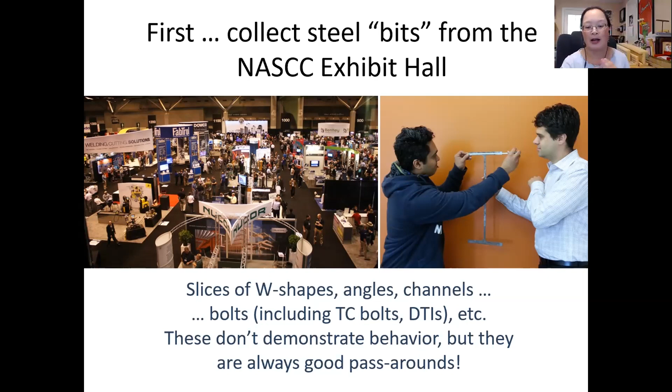Let me start at the top of the list with some foam beams and beam buckling models. Credit for these two different sets of teaching aids goes to Scott Civjan - I don't know if he's still on the Zoom meeting, but I saw him earlier. He gave really awesome instructions for assembling these beams out of foam, and as you'll see later, some other materials. I use these all the time.

Probably the ones I use most often are just the rectangular one, and of course you can show plane sections remain plane, and the tension and compression we see in the cross section for flexure. The W shape, I probably use even more. First of all, it's very huggable - it's really fun to carry around with you.

I use this anytime, like in the picture, if I want to show weak axis buckling, or anytime I need a 3D representation to help the students, whether it's side sway or otherwise, or even just talking about flanges versus web and things like residual stresses, and talking about what's going on through the cross section or through the member.

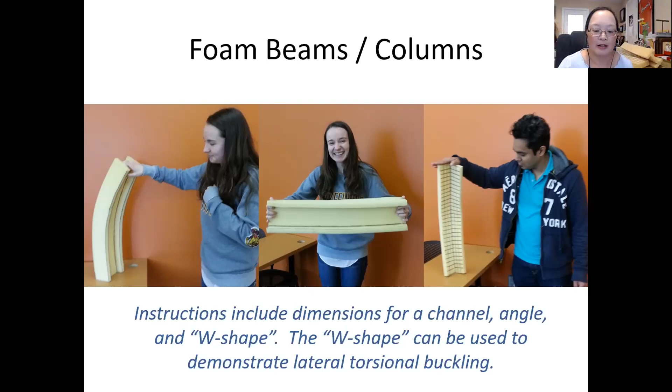Some other cool models from Scott are these beam buckling models made out of overhead transparency and packing tape. You can use these to demonstrate - the instructions show what proportions to use to get one that will show flange local buckling pretty well, one that shows web local buckling - that one's a little harder to visualize, at least with my fabrication skills - and one that shows lateral torsional buckling pretty well.

This one here, I don't know if we'll be able to see - it's a little bit pre-buckled now. But if you can see when I try to put it into bending, I don't know if you can see the flange, the top flange in particular is doing some local buckling there.

And then this one for lateral torsional buckling, you can see it's a little different in the cross section. Usually what I do is try to put this into pure bending, and sometimes it's a little easier to see if I hold it horizontally. You can see just under pure bending, that compression flange is just kicking sideways.

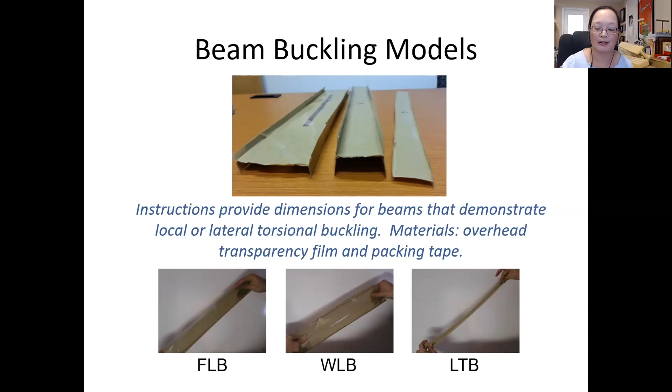So in person, when we're in person, I show at the beginning of class, but then also pass it around so the students can test for themselves.

There are also some great videos online - small scale tests linked from a playlist that's also linked from the AISC Educator forum. Some really neat lateral torsional buckling and flange local buckling, but also different column tests that they did. Lower on the playlist, I believe there are some bolt tests showing bolt shear and bolt bearing failures - a nice collection of different videos that might be useful.

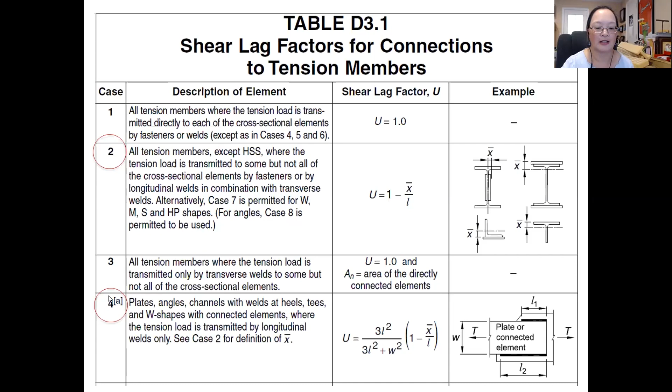And then getting into things like effective net area. When I started teaching steel, I felt like Table D3.1 was kind of a mystery to students, as far as what's going on here, why do we have these different things going on with effective net area and these shear lag factors. So I just want to highlight a couple of things for Case 2 and Case 4 with some hands-on demos that you could use.

For supplies, you just need some paper, some cardboard for connecting on one leg of this paper angle at one end and connecting to both legs of the paper angle at the other end, some tape to connect it all together, and a marker, optional, if you want to show connections there.

I'm going to show parts of a quick video here. This is a link to a playlist that has a different collection of videos that I'll be showing today, and some more. Let me switch over here.

All right, so are we seeing the playlist now? Yes, no? Okay, wonderful.

So this is the playlist, and again, it's linked. You can get to it with that link on that slide. These are more fun to do in person, but you are welcome to use these videos if you would like to. I caution, they're very, very homemade, not very professionally done, but if you find them useful, that's great.

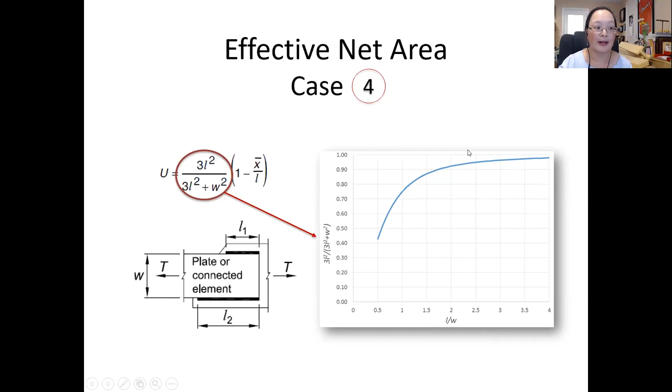We can do a very simple demo just using patchwork quilting fabric or something similar to that.

And when I had to do this remotely - usually I should mention, usually I have at least 3 people doing this: one person trying to be uniform tension, one person trying to be the welds at the other end, and then me talking through the demonstration and doing some tapping.

But when we were remote and I just had myself and my helper here, let me switch back to the videos here.

Oh, come on. Oh, that didn't work. Hold on, try again.

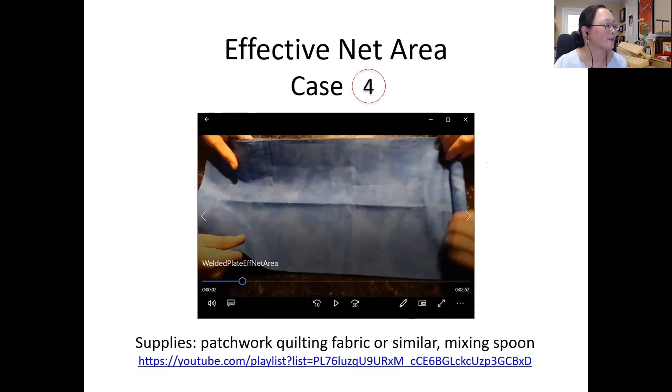All right, I added a mixing spoon. What you'll see here is at the end, that's the uniform tension across the cross section. I rolled the fabric around the mixing spoon, so I could just grab onto that spoon, or anything with a long handle, with one hand and have fairly uniform tension at the end.

Here I'm talking through the aspect ratio between the length of the welds and the distance between the welds. As we're initially applying tension, we can look at how the stresses are distributing from the cross section with uniform tension over to the section where the welds are. That portion where I'm holding onto or pointing out there isn't a lot of tension, it's just kind of flopping around, as opposed to where there is some good tension in the plate.

You can kind of feel it in the fabric. And then you can change the aspect ratio between the length of weld versus the distance between the welds, and describe how that is different than the previous case. So we have something like that going on. And then, go back to this presentation.

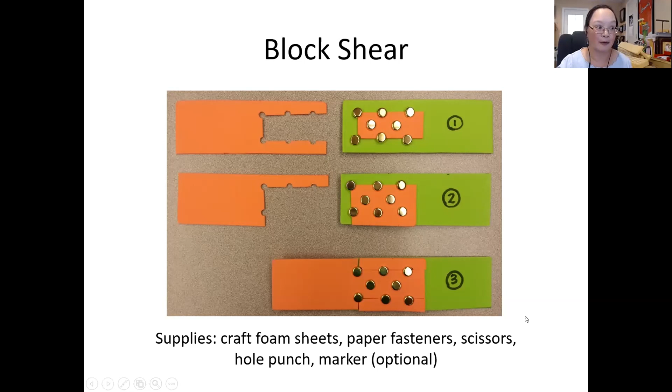Similar discussions happen for these other modes that we have here, and we talk about what's different if we have a different bolt pattern and so on. That sure helps set things up for when we do different calculations and examples.

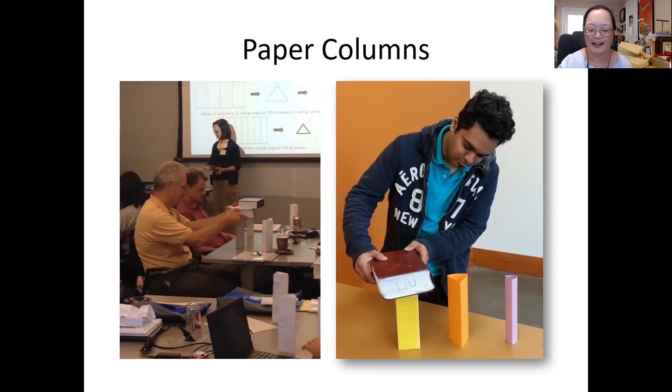You might be able to guess what happens - these two do fine as far as supporting the load, and this one doesn't fare quite as well in terms of supporting the load. That's kind of fun. I always enjoy the students' faces when they walk in - I usually do this in the lab session - and they see all these materials on the tables, they're like, what is this? It's like kindergarten again, so it's a fun departure from the regular class activities.

When I do this remotely, and may or may not do this when we're back in person, I did a discussion board assignment where students, individually or in groups, did these tests on their own at home and posted their predictions for what would happen, as well as photos or a short video clip of their load tests. When I posted the assignment, I included an instruction video about how they were supposed to fold the paper, being careful about fabrication and loading, especially for the one that gets local buckling.

After all the students had submitted, I posted the results of my own column test. After the students posted their predictions and photos or short videos, other students reviewed and liked their favorite post from classmates. The one with the most likes was the one that we shared and discussed in class.

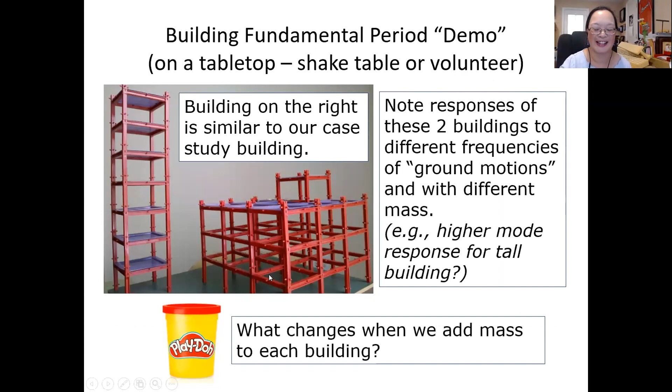Some other things, like if you're talking about earthquake loads acting on your steel building, kind of a shake table demonstration. This particular one I did - this building on the right is very similar to the case study building we use in class, and then a taller, skinnier building here. We also played with mass, adding Play-Doh, and looking at the responses of the different buildings.

The materials I used here were a girder and panel set, I think originally from the 50s or 60s. I got one of the original sets from eBay for Christmas one year - best Christmas ever.

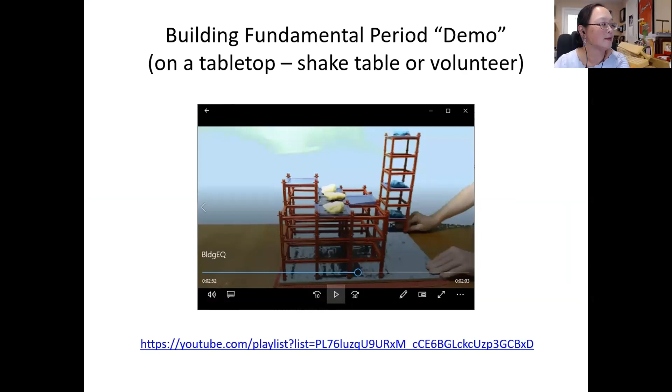But in any case, let's take a peek at the video here. I don't know why it doesn't want to do that. Oh, come on. All right, there we go.

When I can, I borrow from one of my colleagues a little tabletop shake table, but you can just do this with a wooden base and just with people power.

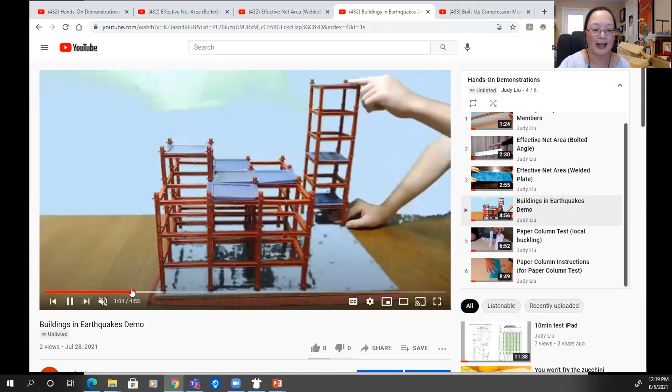And so we talk about what we expect from these different buildings as someone is acting as a... oh, come on. Apparently I did a lot of talking on here.

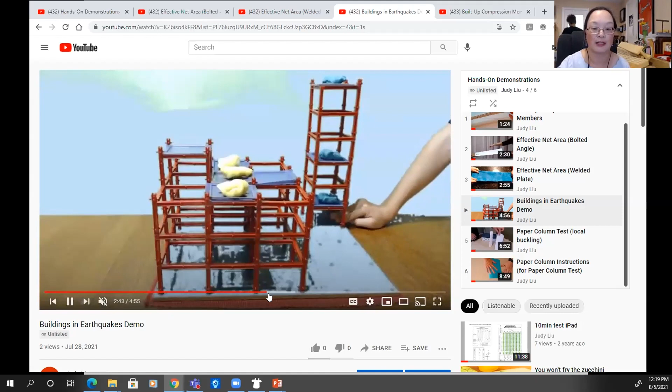Someone acts as an earthquake, and we talk about the different responses of the different buildings and how that relates to the fundamental period of the building and the frequency of the ground shaking. Then we add some Play-Doh mass and also talk about what we'd expect in terms of the different response and how that's realized.

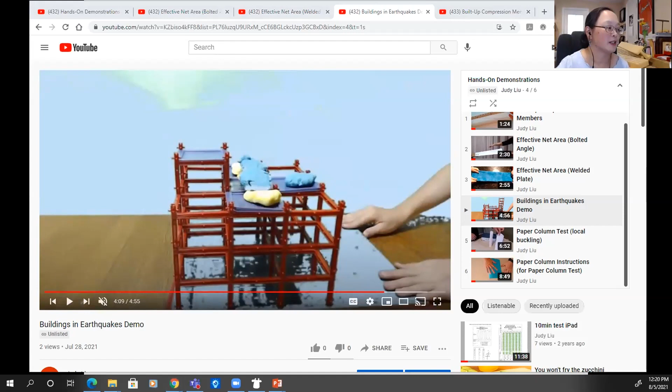I do have a problem with uplift with the taller building, so at one point we take off the taller building so we can look at the ground shaking it takes to activate this shorter building here. So that's a fun way to get some visuals for our earthquake loading.

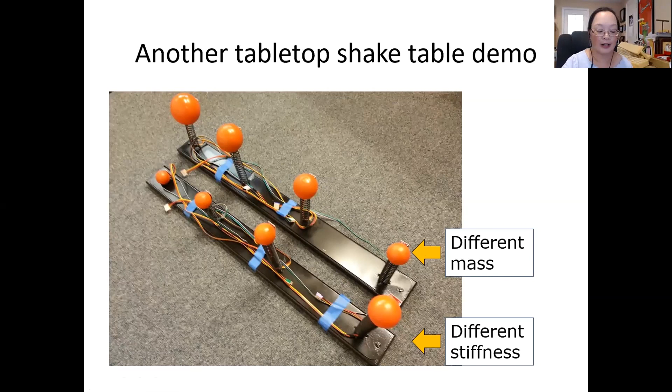I believe below this video there's also a nice supply list if you want to make your own demonstration that looks something like this - simple but very effective. Some of my colleagues made these very simple single degree of freedom models, ones with springs - same height springs but different masses, and then same masses but different stiffness springs. Those are always very simple and effective as well.

I don't know why it never likes to do it when I do it first. Okay, third time's a charm, I think. Come on. There we go.

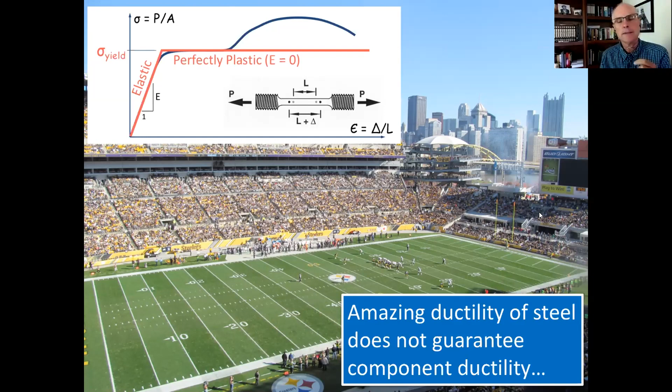Okay Judy, so - all right, no problem, let's start here. This is actually what it looks like. If we start at a stress value of 0, with corresponding strain at 0, we'd be at the 0-yard line. If we apply enough stress or strain to get the material to just yield, reach our yield point, that would be the 1-yard line - so for the full football field, we've only advanced 1 yard.

Then to get to strain hardening, we'd advance 9 more yards to the 10-yard line. And to really demonstrate the ductility, this material doesn't rupture until you travel 90 more yards in football field terms. So there's a phenomenal amount of ductility in steel, and we can take great advantage of it if we know what we're doing.

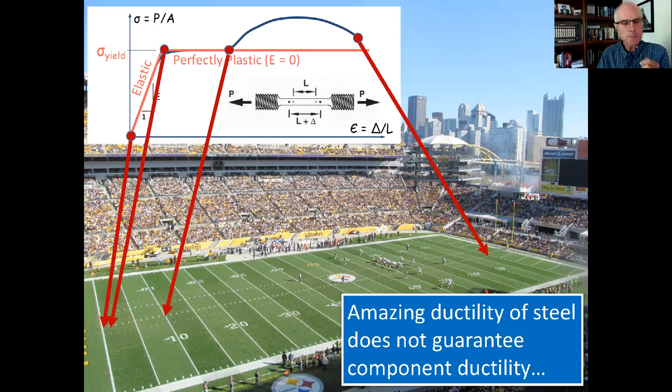On the other hand, just because you have ductile steel doesn't mean you'll get the performance of a connection like that. We think back to Northridge and those types of problems we've had in the past, but those are behind us now. All right, next slide, Judy.

One of the concepts I try to demonstrate to students, that they sometimes have trouble with, is the idea of residual stresses. Many of you are aware of this, but I'll recap so you're up to speed. Effectively what happens is the section is rolled into an I shape, let's say, and then it's put over on the side to cool.

When it cools, when it's super hot, it doesn't really have much modulus of elasticity. For a while the whole section cools pretty uniformly and starts to shrink in length. But eventually, areas with the most surface area, like the flange tips, tend to cool before the flange-web intersection. Once those flange tips cool first, their modulus sets up pretty close to the full E value, while the hot zone in the center still has a pretty small E value, so it continues to want to contract.

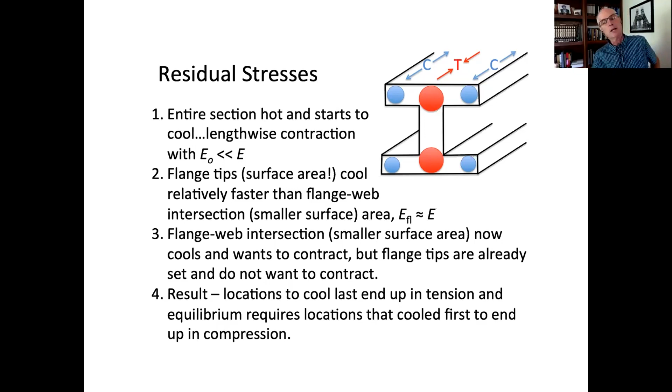So to make this real for the students, what I tend to do is have 3 students and 2 broom handles. The only thing that takes a minute is getting your bearings on the orientation. I have 3 students there, and their t-shirts vary: 2 say flange tip, and they're on the outside. The center student has FW on their shirt, for flange web intersection.

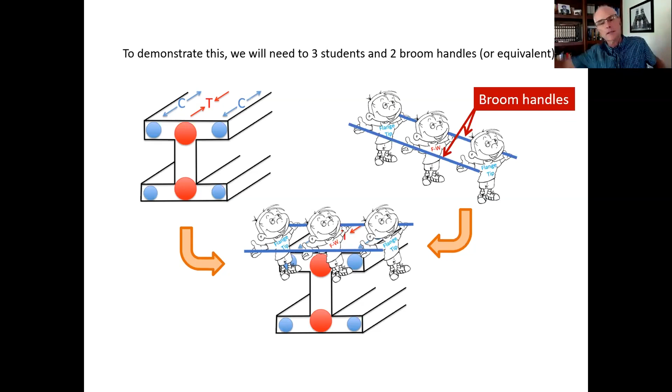So the students start with their hands pretty far apart, holding the broomsticks. All 3 are holding the broomsticks, oriented so that the length axis of the member is the length axis of their arm, going from one hand all the way across to the other.

So if you've got that down, we say: okay students, let's imagine you're all super hot, you've just been rolled, and start cooling. At first, all 3 students pull their broomsticks very slowly, just a small amount toward each other. But the flange tips, the students on the outside, suddenly start cooling more quickly and firm up, and they're going to lock up.

So the flange tips now are locked up, at full strength and no more contracting. But the flange web intersection is still hot and continuing to try to contract, and when it does, it's of course pulling inward.

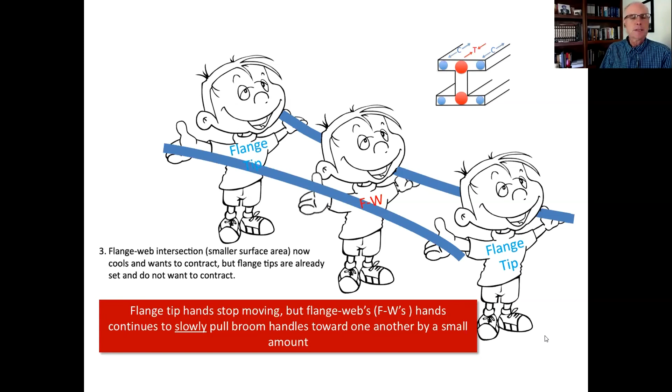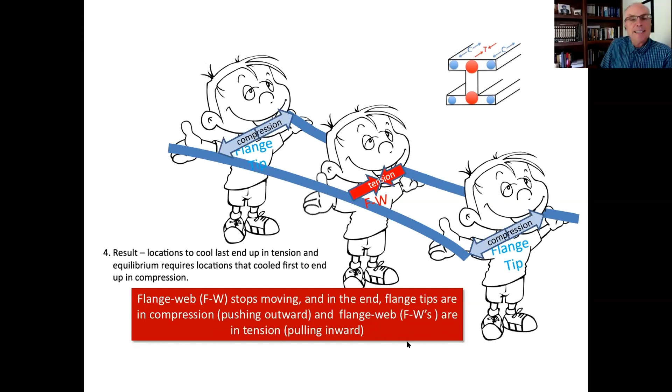You end up with the broomsticks bent to show what's going on. So if you do the mechanics, the center portion, which is pulling inward, is of course in tension, and the flange tips, which are both pushing outward, are in compression. But nothing's moving — the whole thing is in equilibrium. That's a demonstration of how things work.

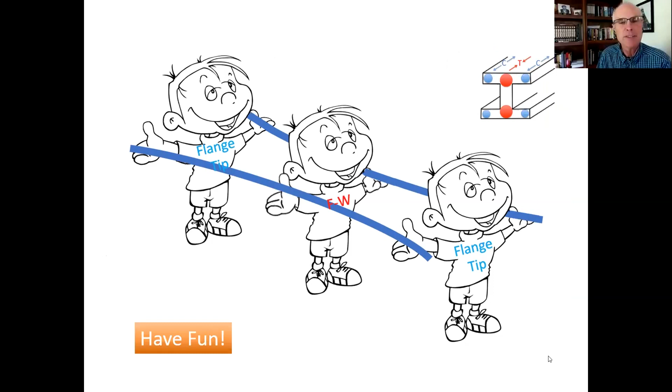And then of course you can have some fun. One more click, Judy. Does anything happen? Oh no, they're not going to behave today. Sorry, I don't know why it's not working. But you have to describe what they'll see. No, I just took 3 days out of my life building that. No, but what will happen is the students pulling in and out — I had a little animation of this, but no big deal. All right, so that's the first one. If we were in person for our faculty workshop, we'd have 3 of you come up, as we have in years past, and do this demonstration, broom handles and all.

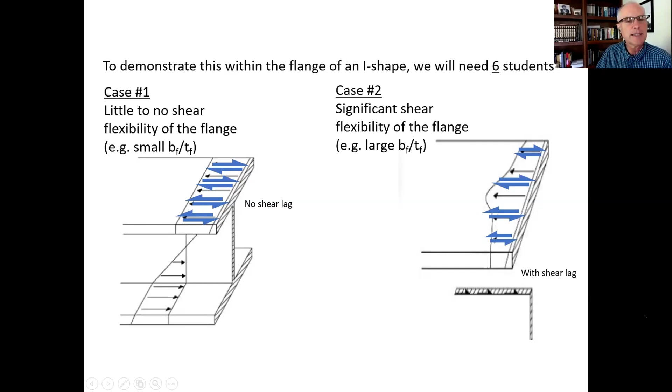All right, so here are our 6 students. They sort of look like ducks here, but they're all lined up. Oh, I'm sorry, 5 students. I don't know - oh yes, we have a 6th student coming. But we have the 5 students all lined up, all sort of next to each other. The students on the outside are the flange tips, and the student in the center is the flange-web interface.

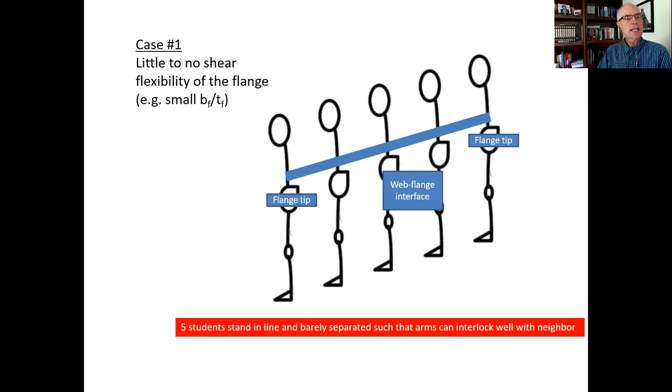And the first case is with no shear flexibility. So these students, all 5 of them, are pretty close, and usually what they do is wrap their arms around each other, so they've got a significant amount of shear stiffness between each other because their arms are all wrapped around one another.

Once we've got everyone lined up, then we introduce the web. The web has some normal stress that it's going to try to transfer into the flange, and it pushes at the flange-web intersection. Because all the students representing the flange have their arms very tight against each other, there's really no room for shear deformation, and all the students bend over at the same time. So that's a good uniform distribution of normal stress.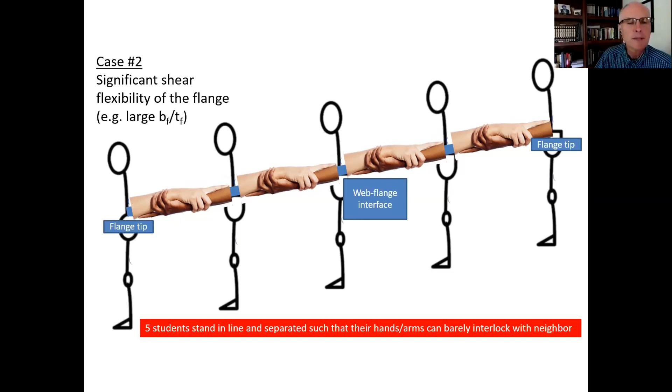We deliver the web, and the web now delivers this normal stress into the flange at the flange-web intersection. But because the flange is so flexible with respect to shear, maybe the students closest to the flange-web intersection bend over a little bit, but the students way out on the far outside aren't doing anything to resist the stresses that the web is inducing. So we're getting quite a bit of shear deformation between the 5 students up there.

So that's a physical demonstration of shear lag.

Here we are at one of our previous workshops, and this picture is kind of crazy. Well, it's just demonstrating case 1. So we've got our faculty all happy and hugging here.

If you actually look on the faculty shirts, there's a slide showing the shear lag from the previous faculty workshop. It's like a bizarre Escher scheme, a picture on top of a picture. Here they are demonstrating the situation. They're not Greek dancing, they're actually demonstrating the shear flexible situation, and I am the web getting ready to transfer stress into the shear, into the web, into the flange at the flange-web intersection. So that's our demonstration there.

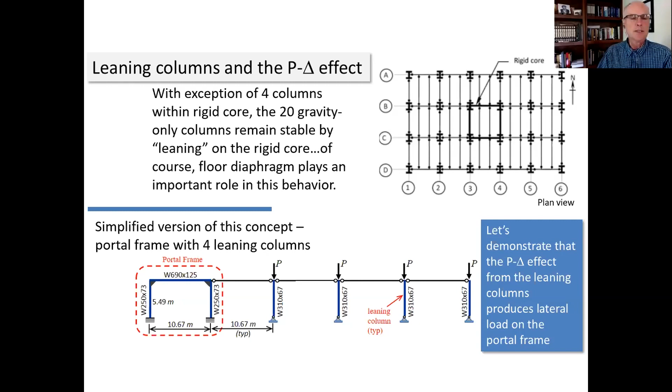I'll flip to a more simplified version of this concept shown at the bottom, where we have the portal frame, that's the core, if you will. To the right we have 4 leaning columns. What I'm going to do is introduce a leaning column, and we're going to see how much each one of the leaning columns increases the load on the portal frame.

So to do this, we'll need 4 students and a bathroom scale. We start off, of course, with the bathroom scale at 0 and pushed up against the wall. The wall is our core. At this point we have 1 student, and that's 1 leaning column. It's important that the student leans and that they're only on 1 foot. If you have them on 2 feet, they're going to develop some moment themselves, so let them be on a pin support. If you follow the scale, there's a little red arrow.

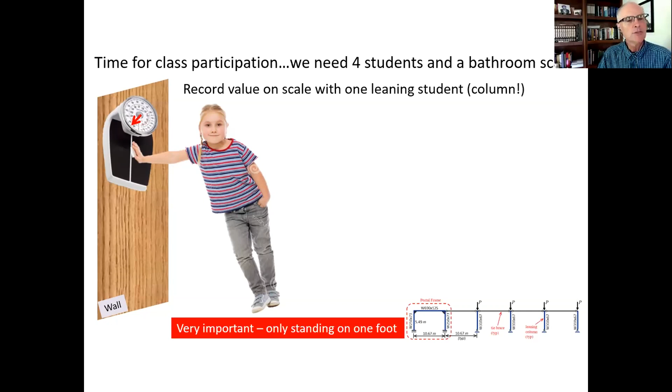As you start to increase the number, you can see we've increased the load on the scale. We now have 2 students, 2 leaning columns, and against the wall, 3 leaning columns. More load should be recorded on the scale. Then 1 more, and we've got 4 leaning columns, each one exerting some force. You can start to do interesting things, using the mechanics of equilibrium to establish how much force each student is applying, and then the total, which should be pretty close to the reading on the scale. Kind of fun stuff there.

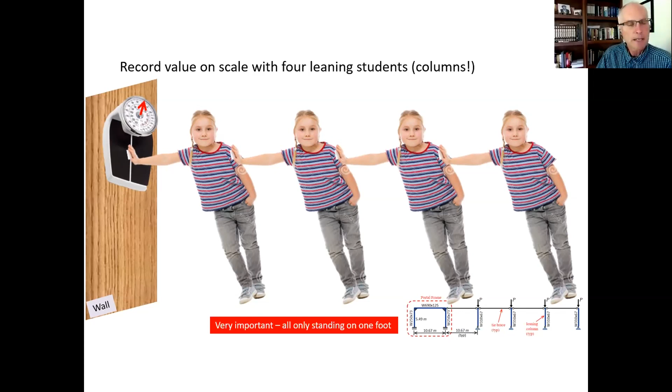Again, everybody needs to be on 1 foot. Oh, here we are at a previous AISC workshop.

Just to make sure things are a little bit more unstable than they need to be, AISC introduced beer and wine to increase that destabilizing effect. But you have to be a little bit careful. The students really kind of enjoy this one, they really start to lean, so they have a large initial imperfection. What will happen sometimes is they'll buckle out of plane. They're on 1 foot, they're all leaning, then somebody falls out of plane, and then they all fall out of plane, and then you're at the infirmary. But no, it's kind of fun.

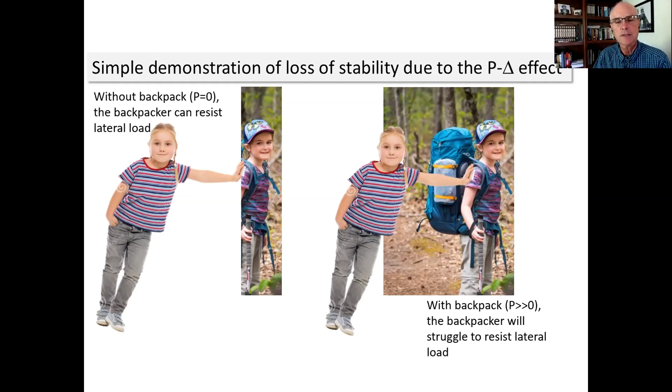The last simple one is just what I call the backpacker example. You start with a student that doesn't have a backpack on, and they get nice and happy with their feet stable, feet together. Then another student will try to push them, and that's not too bad, they can resist pretty well. But then you fill up the student's backpack with every book in the class, or have somebody else get up on their shoulders, and now you have a lot of weight on the column. The person there starts to push laterally, and you'll see just how unstable that column is, and that's all a result of the P-delta effect.

So those are my examples, and keep in mind these are all trained professionals, so no, I'm just teasing you. Oh, it looks like I have one more, live loads. I thought this was sort of interesting for you to do.

So here they have 12 people in photo 1, upper left, which is about 5.3 square feet per person. You have to get the people's weight, and you're about 30 pounds per square foot.

Photo 2, they've increased the number of people. They're up to 45 pounds per square foot, then 60 pounds per square foot. Now you're starting to get to the design loads you may find in ASCE 7 unfactored. So we're at 60 pounds per square foot.

With 30 people in that 8 foot by 8 foot square, we're at 76 pounds per square foot. And then finally, with 36 people, it's very uncomfortable, everybody is literally on top of each other, and you're just shy of 100 pounds per square foot. So then you can ask the students: this floor was only designed for, say, 60 or 50 pounds per square foot—how come they haven't gone through the floor?

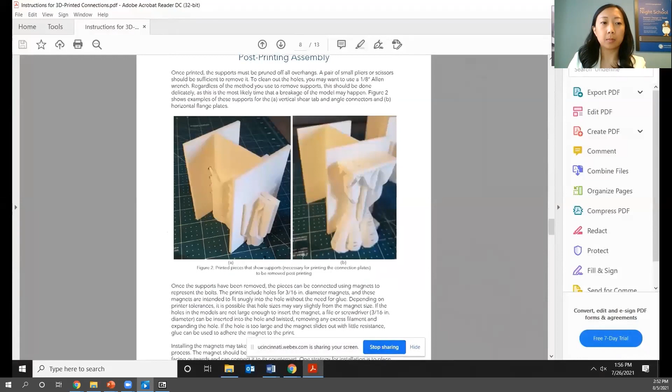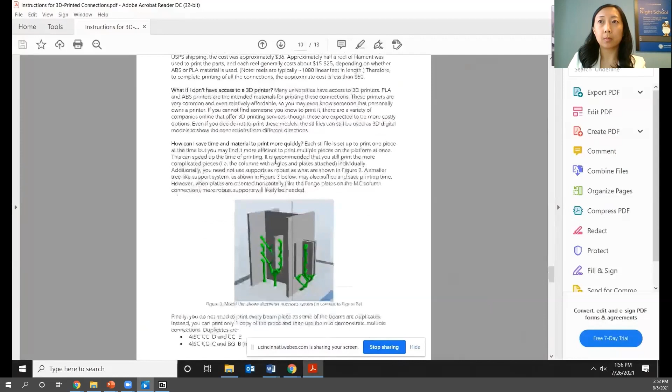We've provided some suggestions of supports and things like that. And then the frequently asked questions, talking through what if you don't have access to a printer, what does it cost, those sorts of questions. And then talking points. The whole purpose of this is to be able to use it in a class and show why one option might be better than another. So these would provide some talking points as you're working through each of these connections, so you have access to it and have good things to talk about in class.

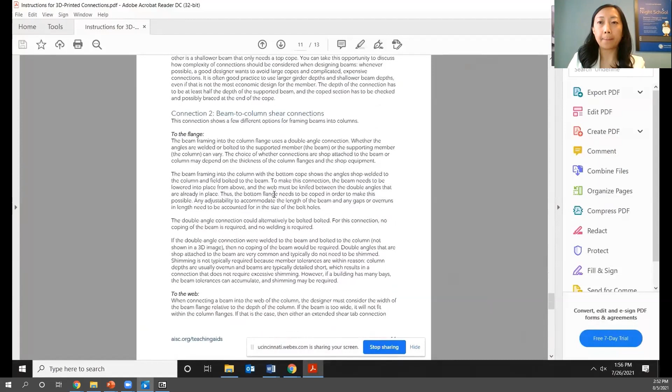Within the file structure, so each connection, outside of the README file, we have the actual file that we used to create everything. So if you wanted to modify it in some way and create another connection, you're welcome to do that. And then within each connection, there are just photos of it, so you know what it will look like.

And then each piece, so we've labeled each piece. In this case, this is the girder that would be printed in the beam to girder connection. It's already been oriented in the way that we would recommend you do the printing. There's no scaling or anything needed. You just need to set it up with the basic printing process and go ahead and print it.

So we have each piece ready to go for you, where you just need to send it to the 3D printer, basically.

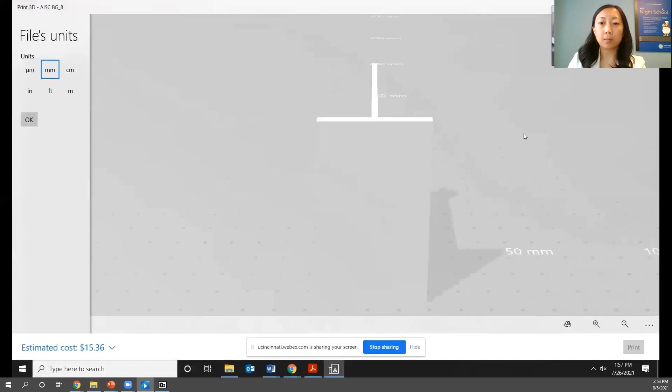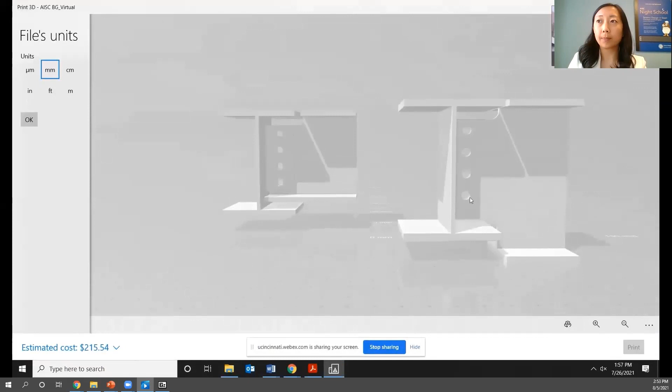Here you can see that we've coped part of it, so you can talk about coping with beam to girder connections. And we've also created the beam to girder virtual, which is just combining them together, so if you didn't have a 3D printer but wanted to still show these things, you can provide these to students. It's like an electronic version of the 3D printed connections. You wouldn't print these pages or files, but it's just a way to make them available to you.

I just want to mention the cost at the bottom. It has no significance. It does not cost $215 to print this. We don't know exactly where this gets generated from, but it is not a real cost of the connection in the real world or the 3D printed connection. So just make sure you don't pay attention to that.

And so that's really it. We provided, again, 4 different connections with 2 others coming, where it just basically gives you the opportunity to pass it around, point out certain aspects of constructability, and hopefully make connections a little bit more understandable to your students. I hope you find it helpful. Thanks.

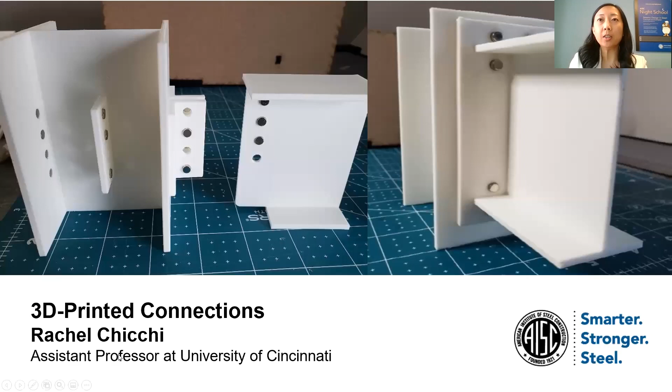So that was the first teaching aid, the 3D printed connections by Rachel Chicchi from University of Cincinnati. We've actually had some people test it out already at different universities, and they're really quite easy to make.

So our next teaching aid, the second out of the 4 that we're profiling, is the Structural Fire Engineering Teaching Modules produced by Erica Fisher, who's an assistant professor at Oregon State University.

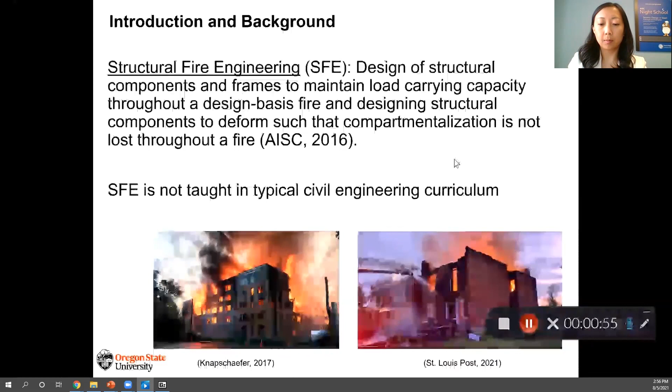Each of these teaching modules has three, or four, different parts depending on how you look at it. The first part is supplementary material. Just as this isn't taught in typical civil engineering undergraduate curriculum today, many instructors didn't receive this education either. So we thought it was important to provide supplementary material that gives background for instructors so they feel confident using the teaching modules.

This includes references, in-depth background information on the topics, discussion questions and answers to those discussion questions, as well as in-class exercises and answers to those exercises. In addition, we provide annotated PowerPoint slides, so you don't have to develop your teaching material from scratch. Rather, you can use the slides and information we provide to teach this material in the classroom.

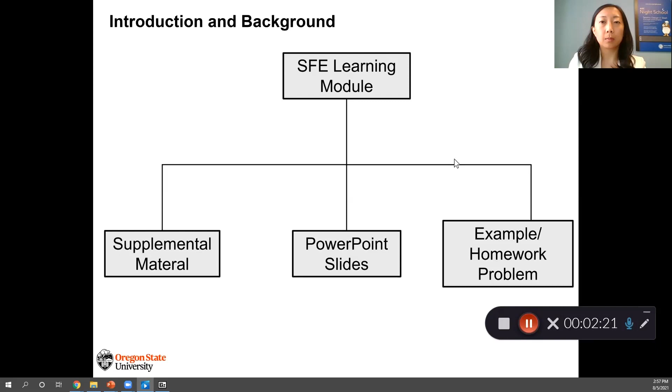And then lastly, there's a homework problem and solution associated with each of these learning modules, so that students can practice on their own and get feedback on their knowledge and how they're doing within the class.

All of this is designed around the concept of the spacing effect. Rather than make a whole new class on structural fire engineering where we provide all this information at once, we're integrating it into the already existing undergraduate civil engineering curriculum, so students get the information throughout their entire undergraduate career. The science on learning shows that students actually learn better when they get a little bit of information over a longer period of time, rather than being inundated with a flood of information at once.

This will also allow them to see the context of what they're learning. So as they're learning about material properties in their strength of materials class, they're actually learning about how those material properties change at elevated temperatures. This way you can link the two concepts together mentally.

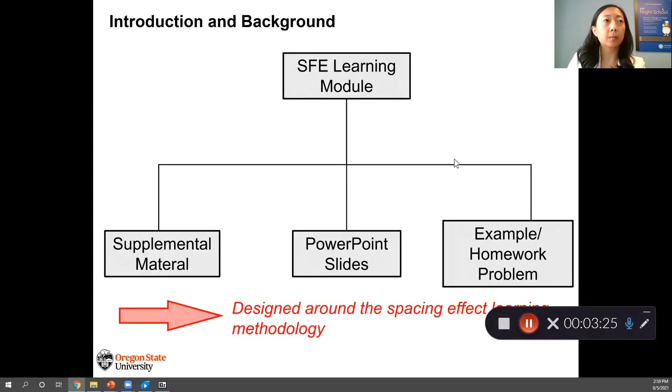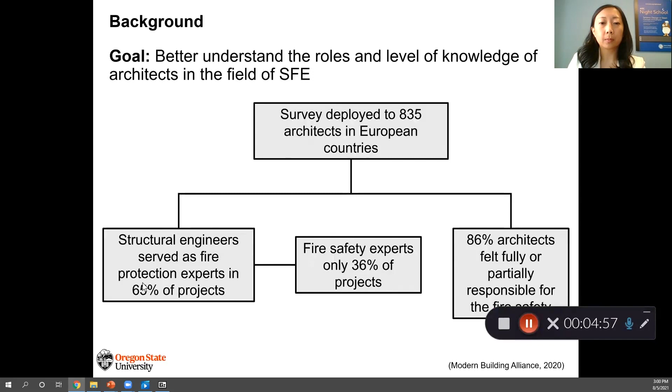Yet when we survey architects in the EU, we find that while 86% felt responsible for fire safety, structural engineers are serving as fire protection experts on 65% of the projects. So the structural engineers are serving as these fire experts, the architects are being held responsible for fire safety, but neither is actually being educated in this topic. This is a massive issue, and so we felt it was necessary to include this in undergraduate education and curriculum so that structural engineers have the language to talk, the knowledge to implement this on jobs, and the knowledge to act as that expert on projects.

So let's talk about the teaching modules. The first teaching module is a mechanics and strength of materials teaching module, covering steel material properties at elevated temperatures. Students are already tasked with testing tension coupons in their mechanics or strength of materials class and developing stress-strain curves, calculating the Young's modulus, calculating the yield stress, and looking at the shape of the curve. So why not do it at elevated temperatures?

This teaching module asks students to take data from tension coupon tests at elevated temperatures, plot it, and calculate all of the material properties, then compare it to those published in the AISC Appendix 4.

And comment and kind of understand and look at how the shape of these curves are going to change with elevated temperatures, and come up with all of the concepts of what is happening to steel as it's being heated.

The second teaching module has two parts depending on how much the instructor wants to engage in this, and it's really calculating the compression capacity of a column at elevated temperatures. Students can do this at a set temperature, or they can actually do it throughout an entire fire, as the temperatures are changing. So the students need to have an understanding of the strength of materials. They have to have an understanding of the material properties at elevated temperatures, and then they're going to use those material properties.

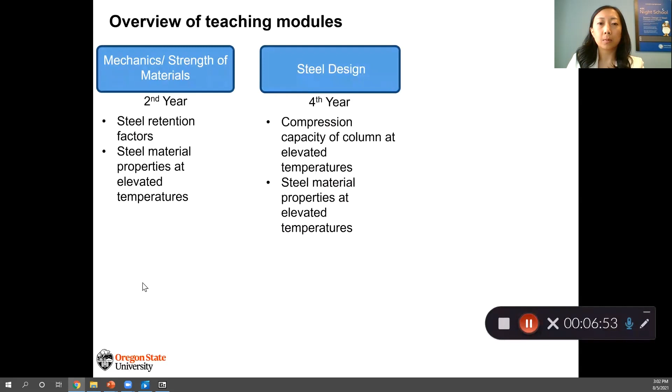So we're building upon what they're actually learning previously. Usually students are taking strength of materials or mechanics of materials in their second year. At Oregon State, usually students are taking steel design in their fourth year. Sometimes that's occurring in the third year at other institutions.

So the last, the fourth steel design teaching module is looking at system level behavior. Building upon what the students are learning in calculating the compression capacity of the column, and then looking at it throughout an entire system. How do forces in the columns and the beams change when the design fire changes? Looking at the impact of those design fires on the force demands in the members.

And then the last teaching module is, again, this fire protection design, going over the prescriptive fire protection design, but also going over what are the different types of fire protection and how do they actually work. So this is also really important for students to understand.

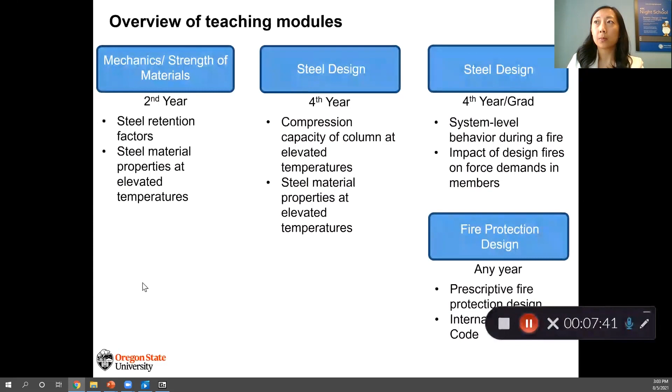All right, so these are the four teaching modules that include all three of these materials here. So we recommend that teachers look at the supplementary material, educate themselves, see what they're comfortable teaching, adapt the lecture PowerPoints to their style of teaching, to what they would like to include, and then there's a homework assignment and answer key. The fire protection design includes just a lecture PowerPoint, it doesn't include all the other material.

I did want to acknowledge some people who were really instrumental in helping develop these teaching modules. Nicole Nickerson is a graduate research assistant at Oregon State University, and then there were members of the AISC Fire Protection Committee that were really helpful in developing these. If you have any questions, please feel free to reach out, and I hope that you all use these teaching modules in this coming school year. Thank you.

Okay, so that was our structural fire engineering teaching modules. The next one we have is a virtual reality teaching aid created by Hannah Blum, assistant professor at University of Wisconsin-Madison. Hannah is actually here in our workshop today, so she can probably answer any questions that you might have.

This one is really interesting because Hannah actually approached us a few years ago looking to see if there was possibly a building under construction that we could connect her to, where she could actually film. So she came down to Chicago a few times to capture this footage, and I was able to go out on site with her, and that was a fun experience. So yes, this is our third of four.

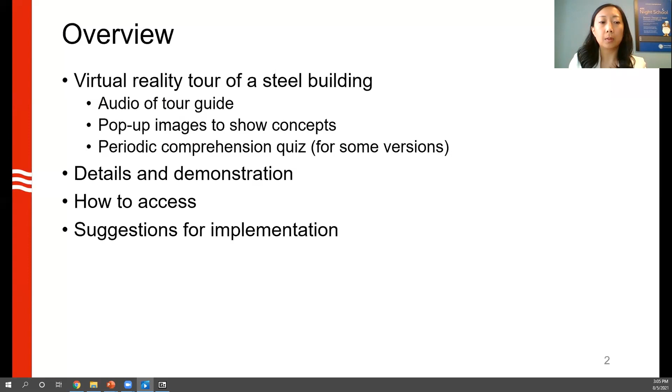Hello everyone, I'm Hannah Blum, and I'm an assistant professor at the University of Wisconsin-Madison. Today I'm going to talk to you about a virtual reality teaching aid. I'm going to give you an overview of a virtual reality tour of a steel building. This has audio of the tour guide, pop-up images to show concepts, and periodic comprehension quiz for some versions. I'm going to go through the details and demonstration, how to access, and suggestions for implementation.

Now, one version is the YouTube version. To access this, you need to subscribe to the AISC Teaching Aid Virtual Reality High-Rise Building Tour. You need to ask AISC for this link. It's currently private. You need to log into the same YouTube account that you subscribe to the building tour with on your VR headset through the YouTube VR app. You can view this as a playlist or select individual scenes to play, up to 11 scenes.

I'm now going to show you a demo where someone is using a VR headset, specifically the Quest, and you are going to see what they see.

Take another look at the 52nd floor framing above you. Do you see the rectangular shaped openings in the beams? These are web openings. You will see these web openings throughout this floor.

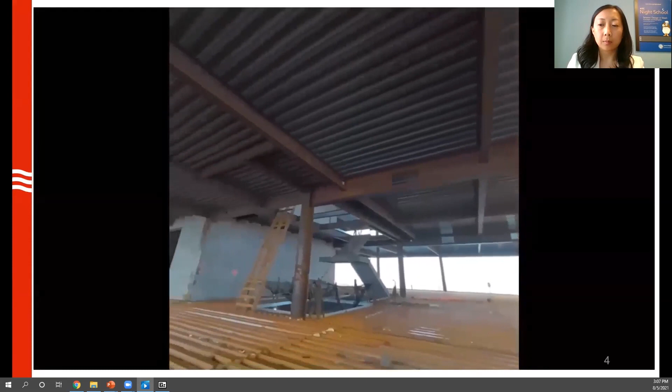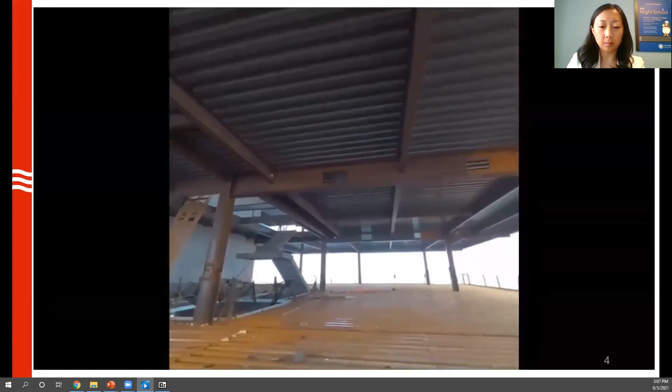Web openings are often made to accommodate mechanical ductwork or plumbing pipes. Working with other trades, structural engineers coordinate the locations of these openings in optimal locations along the beam span. Generally, areas of low shear are preferred because a large section of the web is being removed. Throughout the design process, coordination with the architect and other trades is important for a successful project. In high-rises, the teams include experts in mechanical, electrical, plumbing systems, and vertical transportation, aka elevators.

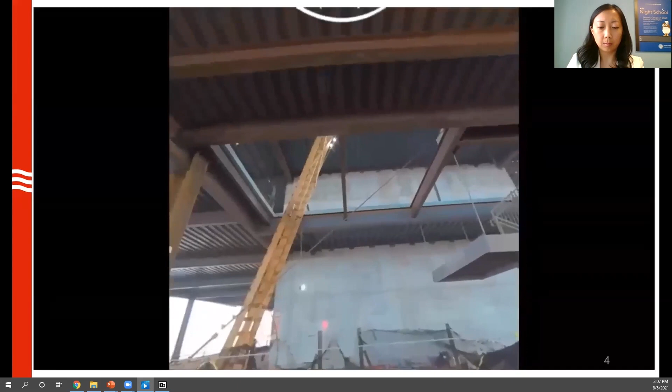On the south side of the building, a staircase connects the 51st floor to the 50th floor below us and to the 52nd floor above us. These stairs continue all the way down to the ground level for egress.

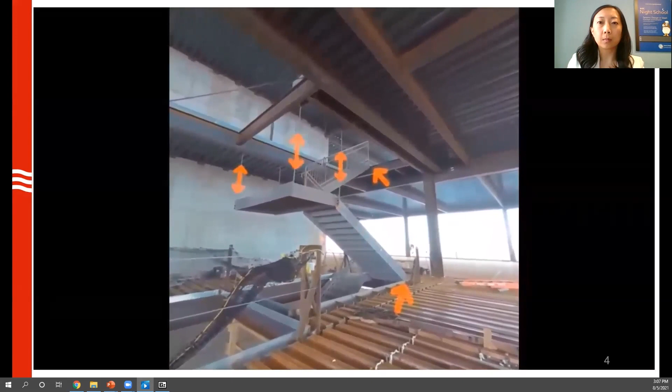Here, the steel frame stair uses steel drop-in stairs. Stringers serve as the main load-carrying members, and the stringers are channel shapes. The channels span from supports, which can be floor framing members, concrete embeds of a shear wall, or steel rod hangers. Stairs are often delegated design.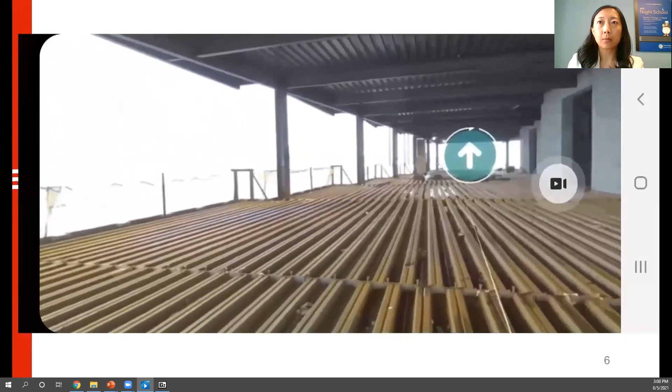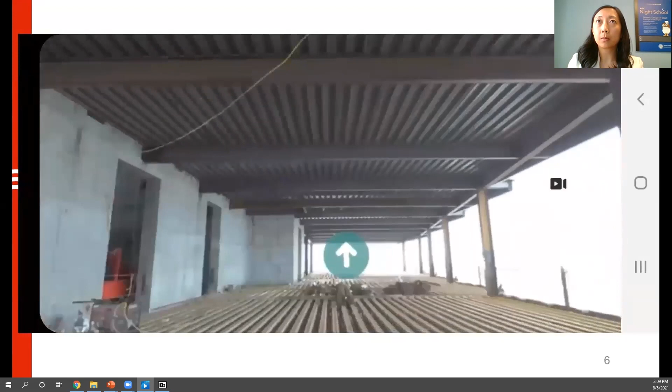Please note you are seeing what the user sees, but this is streaming to a phone and the phone screen is being recorded. This is the only way to show videos on the Go. Here we are moving around the building to locations where the camera was placed. So you can see now we do not have to listen to any explanations. We can just move around freely on our own after the tour is completed.

Another version in development is for the Oculus Quest. There's a slight software issue which we are trying to work out. When this is finished, we will have quiz questions in this app, and this will run only on the Quest headset.

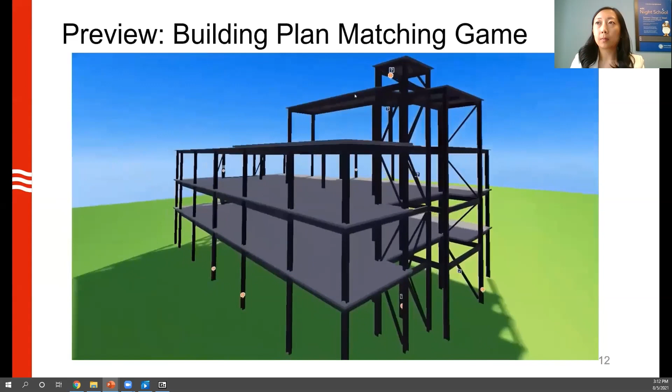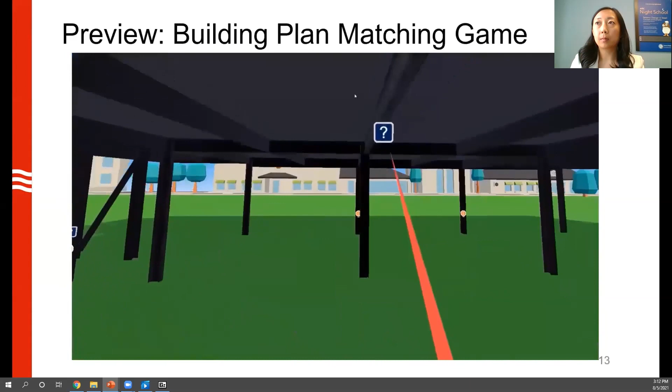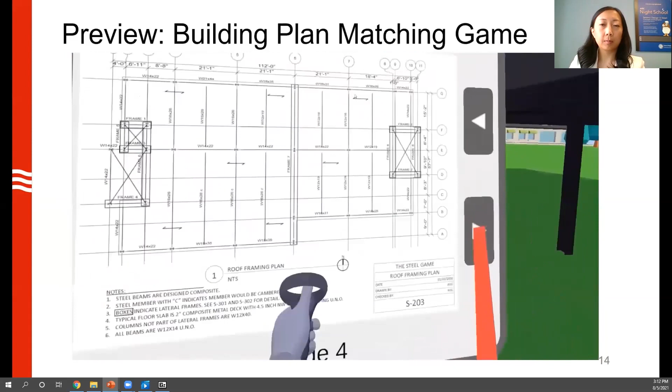I also want to give you a brief preview of a newly developed building plan matching game. This is meant to help students read plans by correctly selecting the identification of several members throughout the structure. The plans can be viewed in the game, along with hints and other useful information. More details on this can be presented at a future venue.

This concludes the presentation.

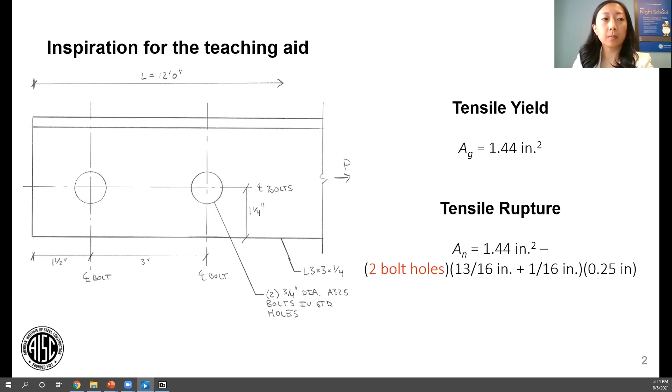Before I introduce the aid itself, I want to describe its inspiration. I see too many errors like this in my introductory steel design course, where students subtract out 2 holes to get the net area when they should only subtract out 1. When students are starting out, they don't necessarily have a feel for what the drawing represents or the limit states they are calculating. They may have never seen, up close at least, a steel angle, let alone one with holes drilled through for bolts. All the necessary details are there in the 2D drawing, but the important cross-section is perpendicular to the page.

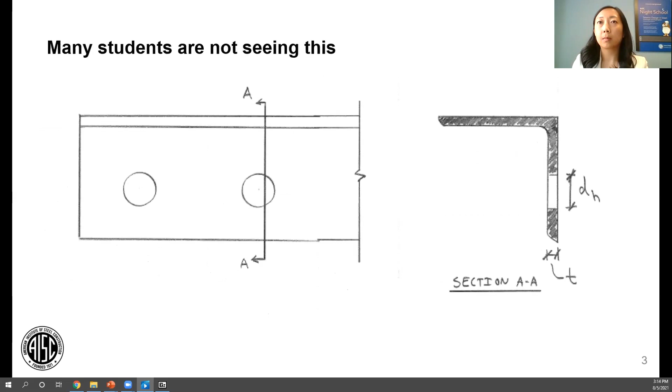And that's a jump. Two-dimensional representations are no doubt useful, but they are often not a good substitute for the three-dimensional reality for folks who are just starting out.

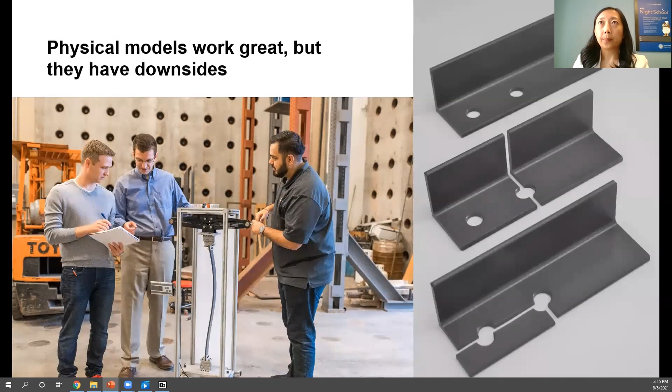This is not just true for connections. Buckling is another area where I sense students have a difficult time visualizing what is happening. Physical models work great to bridge these gaps, but you can't always lug them around, which means they aren't always available when you need them, or when it would be most beneficial for the students to have them.

And that brings me to the three-dimensional model viewer for illustrating structural steel concepts. Three-dimensional digital models are a pretty good substitute for physical models, and this website makes it easy to use them in a steel design course.

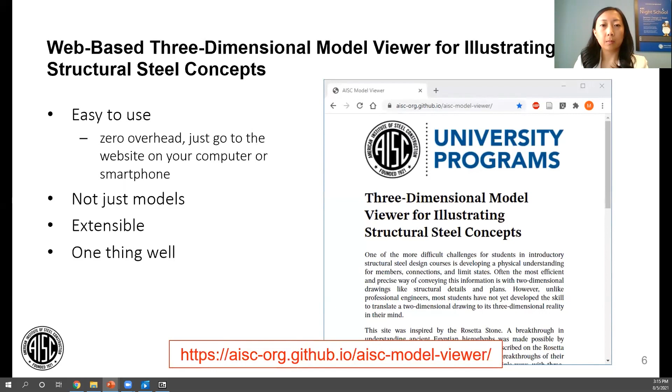Just navigate through the AISC Teaching Aid website or go to the URL shown in red. You can use your computer or smartphone. What you'll find are sets of collections. Initially, a set of 4 collections was developed on tension member connections. With a follow-on project, we developed 4 more collections on buckling.

Each collection has several three-dimensional models plus more related content. The connection collections have 2-dimensional drawings and calculations. The buckling collections have commentary. Both have fun pages with interesting facts and questions for further exploration.

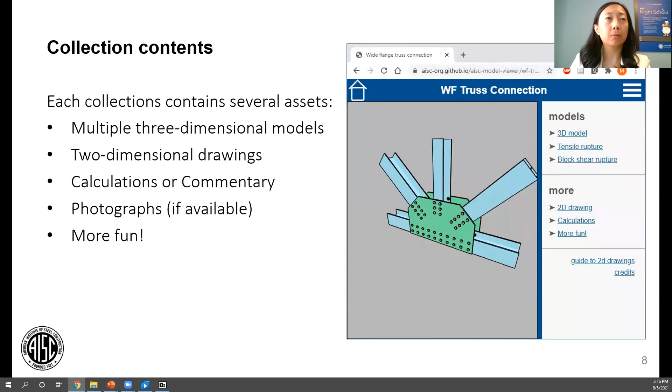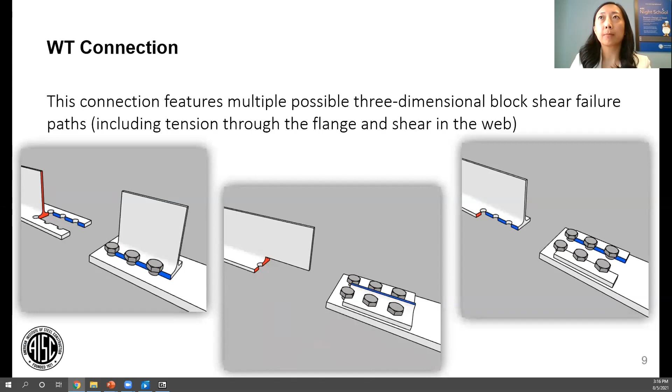The models are designed to each highlight an important feature of behavior. This collection of a WT connection has a set of models that show 3 different block shear rupture failure modes. And they're not just static images—you can rotate and zoom these on the website. I would show that to you if I had better video editing skills.

I plan to use this teaching aid as a visual aid in lectures. We'll try to avoid attempts at 3-dimensional drawings on the whiteboard. I also think it'll be very helpful in office hours for explaining net area and other concepts in a one-on-one setting. I also imagine that students are going to use this on their own—it's going to be there when they need it most, working on homework or studying for exams.

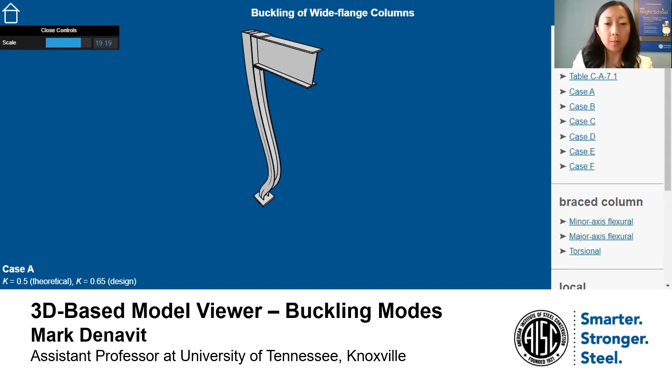Okay, any other questions? Anything else? I did want to mention in the hands-on demo part that Matt Yarnold and Ryan Sherman gave an assignment in their class for students to create hands-on demos, either a new one they haven't used in class to help illustrate a concept, or to improve on one. I think Ryan is with us—Ryan, do you want to elaborate on that?

Hi, yeah, I got the idea from Matt Yarnold to use a lot of the demonstrations presented today, and the students are creative. So if you give them an opportunity to improve on a demo you did, or come up with a new demo for a concept they're struggling with—I put them in groups of three and saw what they came up with. Matt told me the cool things he had them do; I think someone used a 3D printer to eventually create a steel section from the rolling process, so that was pretty involved.

I know Matt Hebdon recently also did it at a graduate level course, and I think he allowed them to do either something at the undergraduate level or graduate level, since by that time they should have had concepts from either side of those courses. It was really a fun thing for the students. They presented it at the end, and the big caveat was that I got to keep the demo at the end of the project, because the idea was that you can pay it forward to your future students—this helped you learn, let's help the next set of students coming through this course learn as well.